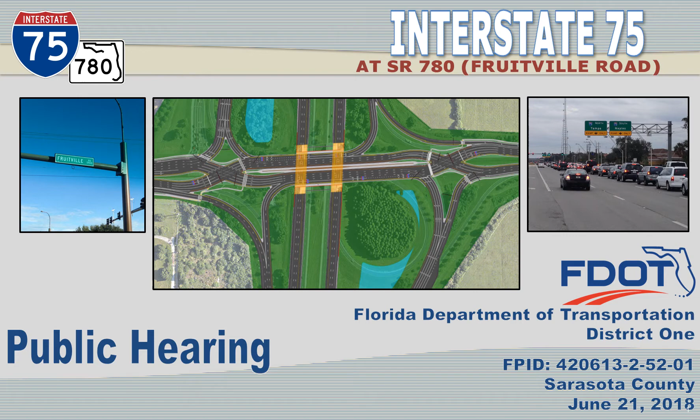FDOT is preparing final design plans for I-75 from south of Palmer Boulevard to north of Fruitville Road, including reconstruction of the Fruitville Road interchange. Both I-75 and Fruitville Road are under the FDOT jurisdiction, while Cattlemen Road, as well as Fruitville Road east of Old Coburn Road, are under the jurisdiction of Sarasota County.

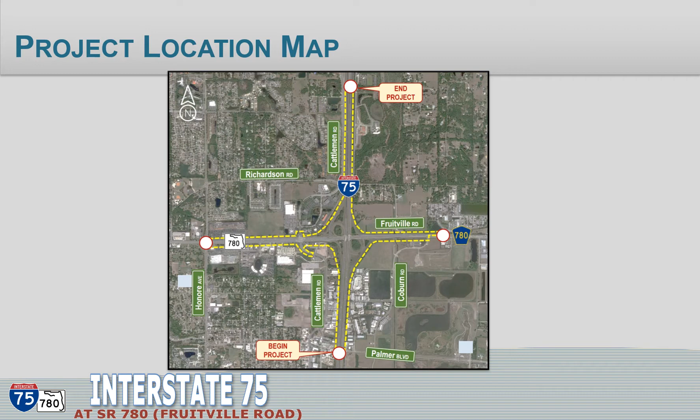The 2011 project need was defined in the Project Development and Environment Study. The project is also part of the Sarasota County Comprehensive Plan, as well as the Sarasota-Manatee Metropolitan Planning Organization's Long-Range Transportation Plan and Transportation Improvement Program, and is also included in the FDOT's State Transportation Improvement Program.

The project is needed to accommodate future traffic demand, improve safety, and for hurricane evacuation. Since the development of I-75 and the Fruitville Road interchange in 1979, the surrounding area has grown significantly, especially west of I-75, while the interstate and interchange have remained the same. Future development is planned to the east of I-75 that will add even more traffic demand to this interchange, including the proposed Lakewood Ranch Boulevard extension.

Between 2014 and 2040, traffic along I-75 through the interchange is projected to increase by 70%, from 120,000 vehicles per day to approximately 204,000 vehicles per day. The traffic along Fruitville Road is also projected to increase from around 53,000 vehicles per day to approximately 79,000 vehicles per day. This growth is nearly a 50% increase from 2014 to 2040.

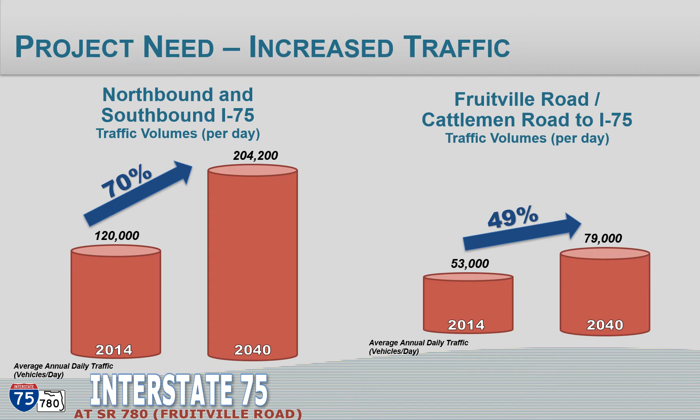FDOT completed the Project Development and Environment Study, or PD&E study, for I-75 from SR 681 to north of University Parkway in 2011. The design phase for the I-75 at Fruitville Road interchange began in 2014 and is ongoing. The final design should be completed in 2019. Right-of-way acquisition is funded in fiscal year 2019 and construction is currently unfunded.

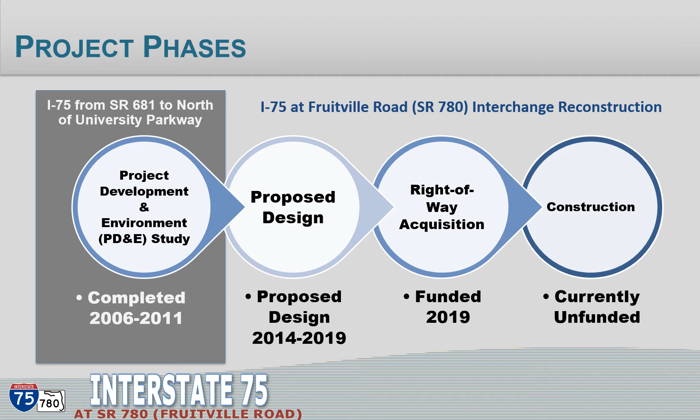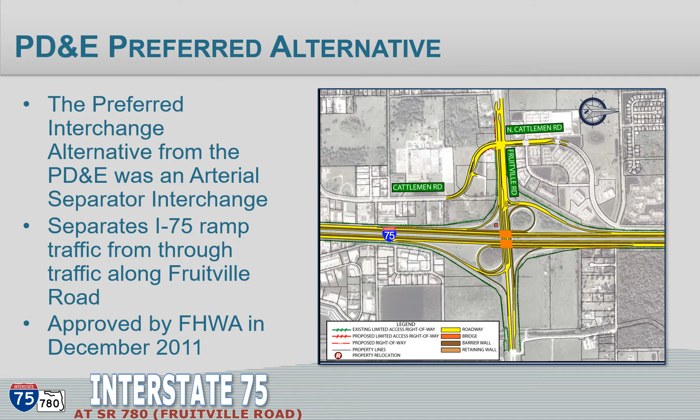The preferred interchange alternative from the PD&E was an arterial separator interchange, which separates I-75 ramp traffic from through traffic along Fruitville Road. This alternative was approved by FHWA in December 2011. The design project for the reconstruction of the interchange at I-75 and Fruitville Road began in May of 2014. At the start of the design phase, the approved PD&E study alternative for this segment of I-75 was evaluated for changes in projected traffic. A diverging diamond interchange, or DDI, was recommended as the preferred alternative through a traffic study. A DDI at this location will be similar to what was recently constructed at the University Parkway interchange.

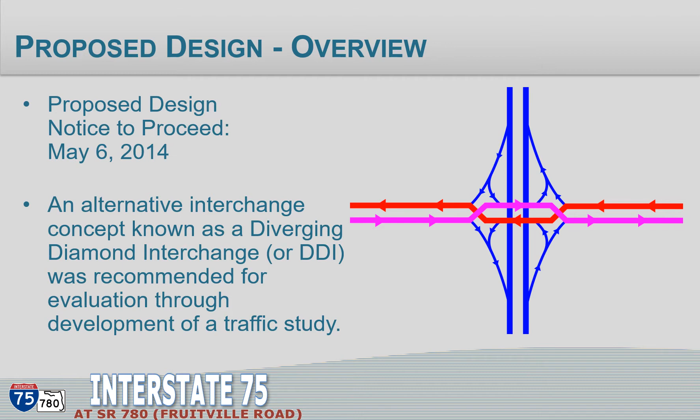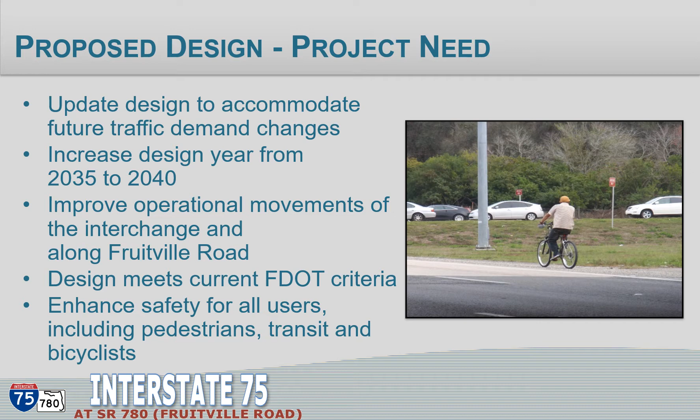The proposed design accommodates projected traffic increases through 2040 and improves the operational movements of the interchange and traffic flow along Fruitville Road. Also, the proposed design meets current FDOT criteria and enhances safety for all users, including pedestrians, transit, and bicyclists. Currently, Fruitville Road has poor lane utilization, since traffic accessing the I-75 southbound and northbound on-ramps must use the outside lanes. A diverging diamond interchange will balance traffic along Fruitville Road by placing I-75 ramp traffic into separate lanes.

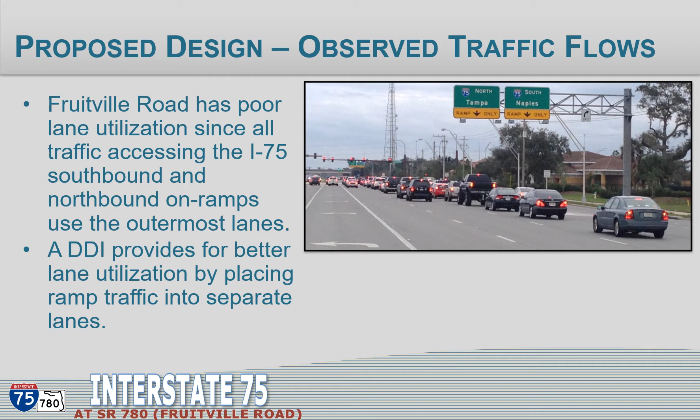As part of the proposed design change, an interchange modification report was completed, and FHWA provided their concurrence. The proposed design will have no substantial changes to the social, economic, or environmental impacts that would significantly affect the quality of the human environment. Also, the proposed design went through the value engineering process. The existing radio tower that is in the southwest corner of the interchange will be relocated, and most of the existing pavement along Fruitville Road will be retained to reduce construction costs.

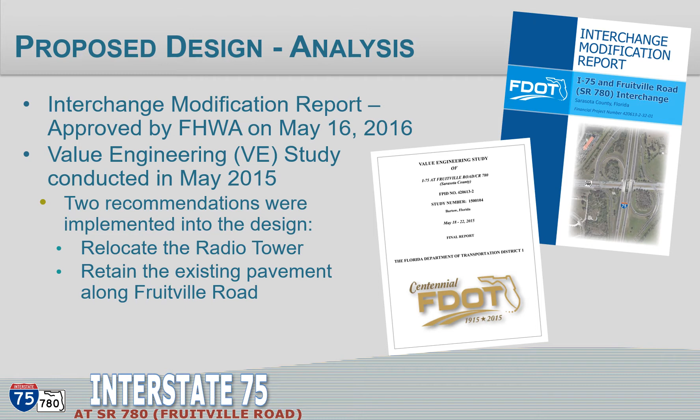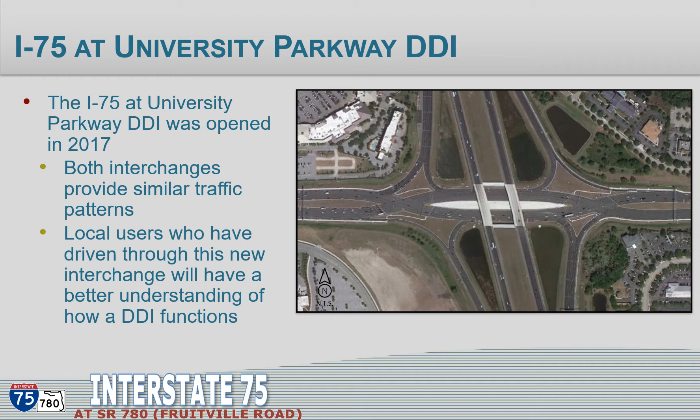The I-75 at University Parkway diverging diamond interchange was completed and opened to traffic in 2017. This interchange, which is immediately to the north of the Fruitville Road interchange, has similar traffic patterns to the proposed Fruitville Road interchange. Let's look at some of the movements of the proposed Fruitville Road interchange in more detail. If you are driving north on I-75 and want to go east on Fruitville Road, you would exit the interchange and turn right, similar to today's interchange.

If you want to go west on Fruitville Road or north on Cattlemen Road, you would exit the interstate and turn left on Fruitville Road at the signalized intersection using the far side lane of the I-75 northbound off-ramp. Then follow the lanes on the south side of Fruitville Road to cross over the eastbound lanes of Fruitville Road to the right side of Fruitville Road after the interchange, and either go straight through the Cattlemen Road intersection or turn right and go north onto Cattlemen Road.

If you want to go south on Cattlemen Road, you would exit the interstate and turn left on Fruitville Road at the signalized intersection using the near side lane of the I-75 northbound off-ramp. Then follow the lanes on the south side of Fruitville Road before shifting to the right side of the roadway after the interchange, and then turn left onto Cattlemen Road.

Now let's look at the movements if you are heading south on I-75. If you want to exit the interstate and go east on Fruitville Road, you would exit and turn left and follow the lanes on the north side of Fruitville Road before shifting to the right side of the roadway after the interchange. To exit and go west on Fruitville Road or north on Cattlemen Road, you would use the outside lane of the southbound I-75 off-ramp and exit like you do today, and then either continue west through the intersection or turn right on Cattlemen Road.

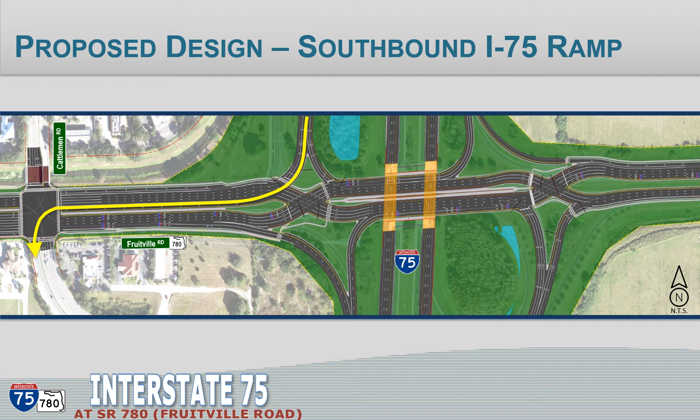If you want to go south on Cattlemen Road, you would use the inside lane of the southbound I-75 off-ramp and then turn right to enter the left turn lanes onto southbound Cattlemen Road. If you are heading westbound on Fruitville Road and want to enter northbound I-75, you would take a right onto the northbound I-75 on-ramp as you do today.

If you want to head south on I-75, you will need to shift over to the near side lanes east of the interchange, then follow the lanes on the south side of Fruitville Road to then turn left onto the southbound I-75 on-ramp. If you want to continue west on Fruitville Road through the interchange or to go north on Cattlemen Road, you would use the far side lanes through the East DDI signalized intersection to cross the eastbound lanes, follow the lanes on the south side of Fruitville Road, and stay to the right to once again cross the eastbound lanes of Fruitville Road and either go straight through the Cattlemen Road intersection or turn right and go north onto Cattlemen Road.

If your destination is south on Cattlemen Road, you would use the near side lanes through the East DDI signalized intersection to cross the eastbound lanes, follow the lanes on the south side of Fruitville Road, and stay to the left to once again cross the eastbound lanes of Fruitville Road and then enter the left turn lanes onto southbound Cattlemen Road.

If you are heading eastbound on Fruitville Road or heading north or south on Cattlemen Road and want to access the northbound I-75 on-ramp, you would go east on Fruitville Road from the Cattlemen Road intersection, using the inside through lane through the West DDI signalized intersection to cross the westbound lanes, follow the lanes on the north side of Fruitville Road and turn left onto the northbound I-75 on-ramp. If you want to head south on I-75 from eastbound Fruitville Road or from northbound Cattlemen Road, you would use the far side lanes to enter the southbound I-75 on-ramp as you do today.

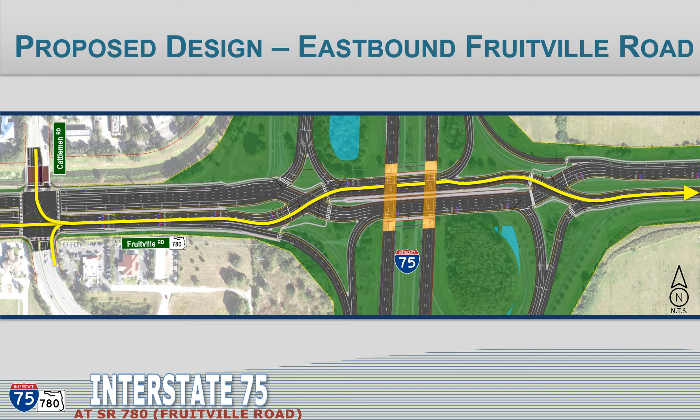I-75 will be widened and reconstructed from Palmer Boulevard to north of Fruitville Road, and will provide new ramp connections to the Fruitville Road interchange. The proposed design will also connect to the proposed reconstruction of the I-75 southbound bridge over Palmer Boulevard, which is to be constructed under a separate project that will provide reconstruction and widening of I-75 from south of Bee Ridge Road to south of Fruitville Road. The proposed design will tie to the auxiliary lanes proposed for I-75 between the Bee Ridge Road interchange and the Fruitville Road interchange, and will retain the auxiliary lanes recently constructed on I-75 between the Fruitville Road interchange and the University Parkway interchange.

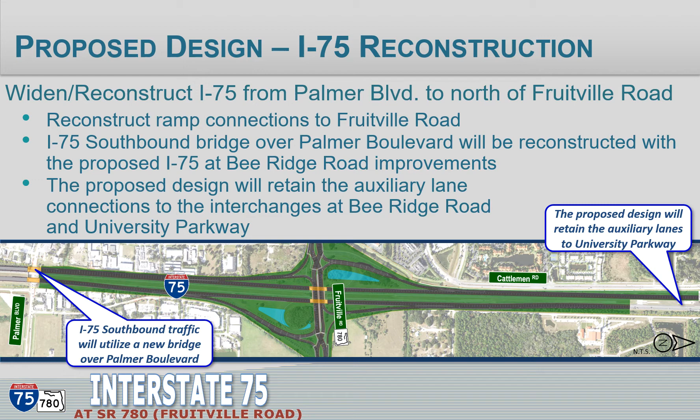Fruitville Road will be widened from Honoré Avenue to the I-75 interchange, and will provide additional lanes to improve traffic flows. The proposed design will provide upgraded transit connections to Sarasota County Area Transit bus routes. Widening on Cattlemen Road north of Fruitville Road will accommodate 3 southbound left turn lanes to reduce the signal timings at the intersection with Fruitville Road.

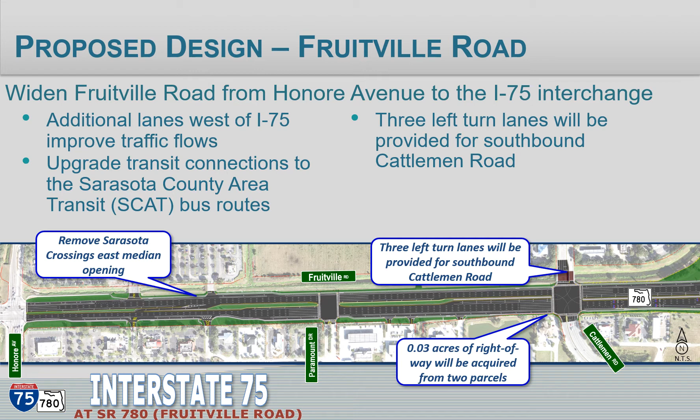Fruitville Road will be widened to the east of the I-75 interchange to east of the signalized intersection with Coburn Road. The proposed additional lanes will accommodate future growth planned east of I-75, including the future Lakewood Ranch Boulevard extension. Through coordination with Sarasota County, the proposed design will provide for 2 eastbound left turn lanes at Coburn Road and will provide widening east of Coburn Road to provide a westbound right turn lane.

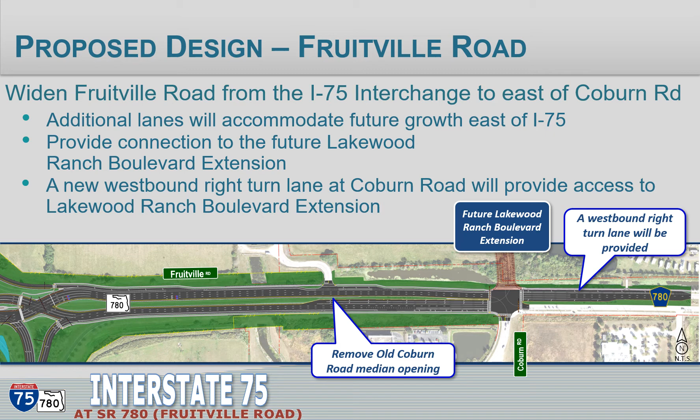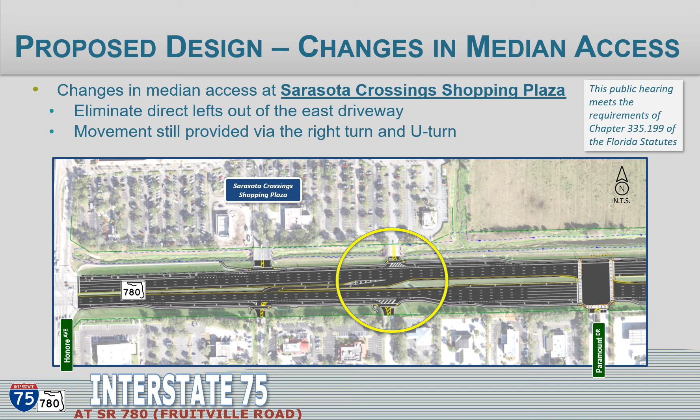Additionally, the existing full median opening at Old Coburn Road, located east of I-75, will be closed due to its proximity to the proposed interchange. Access to Old Coburn Road from I-75 is still provided by conducting a U-turn at Coburn Road. All other median openings and access connections from driveways and side streets will remain as they are today. Refer to the proposed concept plan displays at this hearing for more details.

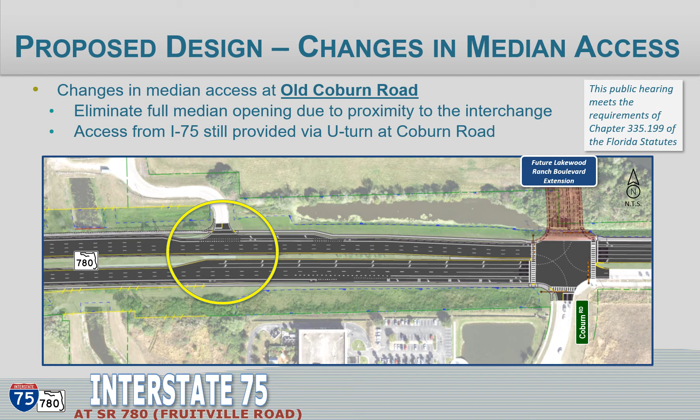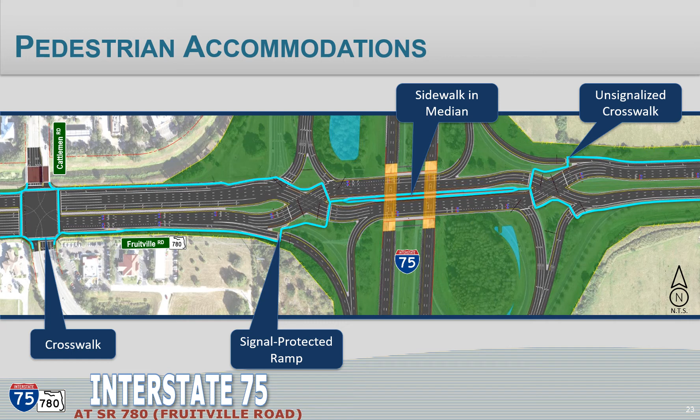FDOT will provide pedestrian accommodations with the Americans with Disabilities Act, or ADA, compliant sidewalks along Fruitville Road through the interchange. Sidewalks are placed to the outside of the roadway along Fruitville Road. However, the sidewalks are then routed through the median between the crossover portions of the interchange. Signalized crosswalks will be provided at all signalized intersections, and also for the proposed crosswalk crossing the 2-lane eastbound Fruitville Road to southbound I-75 entrance ramp.

As part of the proposed design, there will be continuous bike lanes throughout the interchange. Bicycle facilities will conform to the FDOT standards, which call for 7-foot buffered bike lanes to the right of the through travel lanes. At several locations, the bike lanes will include keyholes, or a designated bike lane between a through lane and a right turn lane, to provide a safe area for bicyclists at intersections or ramps. Bike lanes will be protected at off-ramp locations by signals.

The proposed eastbound bike lane east of Cattlemen Road will be shifted from the outside of the roadway through lane to share the proposed sidewalk and will use the proposed crosswalk to cross the 2-lane eastbound Fruitville Road to southbound I-75 entrance ramp and will then be connected back to the proposed eastbound bike lane.

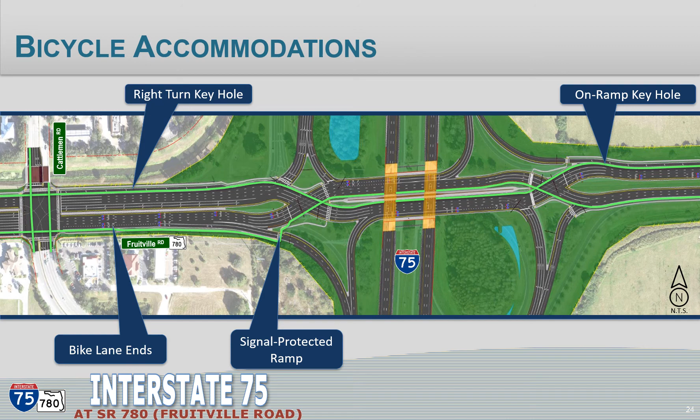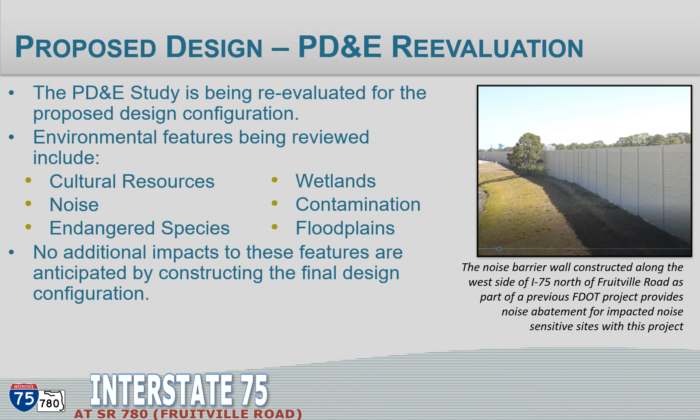This public hearing is an opportunity for you to ask questions and offer comments on the design changes and reevaluation. Project representatives are available to provide more detailed information and to address your questions. There are several ways to comment as part of the public hearing record. All comments received will be reviewed and considered in the study analysis, regardless of how they are submitted. You may make a statement during the formal portion of tonight's hearing, complete the comment form provided in your brochure and drop it in one of the comment boxes today, or complete the comment form later and mail it to the pre-printed address on the back of the form.

You may also visit the project website at www.swflroads.com/I75/FruitvilleRoad and electronically submit your comments there. All comments must be received or postmarked by July 2, 2018 to become part of the public hearing record. For further information, you may contact Ryan Weeks, the FDOT Project Manager, at the FDOT District Headquarters in Bartow, or Zachary Birch, the Communications Manager at the FDOT Southwest Area Office in Fort Myers. Their phone numbers and email addresses are listed here, and both are present at this public hearing.